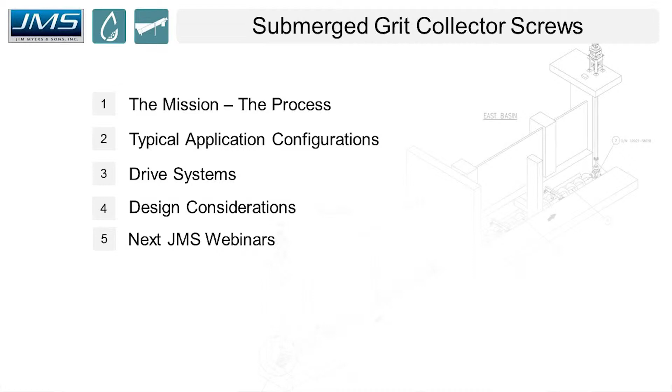These are the topics I'll be discussing today. I'm going to jump right into it — there we go, couldn't get my stuff toggled.

So we'll be discussing submerged grit collector screws. It's a classification process — we're removing grit from the process, conveying and separating grit from the water in the basin. Certainly an abrasive application, I'll hit on that further.

Today we'll be focusing on the horizontal submerged grit collector screw conveyor systems. Typically they're located in aerated grit tanks. We're conveying grit from the tanks to a trap, sump, or well, perhaps in the same basin as the screw, perhaps on the other side of a basin wall. Further conveyance of the grit is required via grit pumps or airlift pumps.

Unlike the grit classifier system — the inclined grit classifier system you see in the bottom right corner, which you're all familiar with — that is partially submerged, inclined, and conveys and classifies the grit above grade directly to a dumpster with no further conveyance required.

So what we'll be addressing here are three different types of applications and configurations: a wet chain application, a dry chain application, and a couple of direct drive applications.

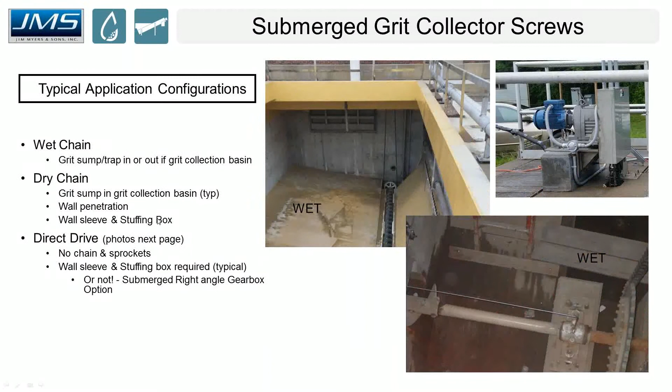Next is a direct drive application, which I'll show you drawings of. I'm moving kind of quickly, trying to get a lot of information in, but here, no chain and sprockets apply — a wall sleeve and stuffing box is employed.

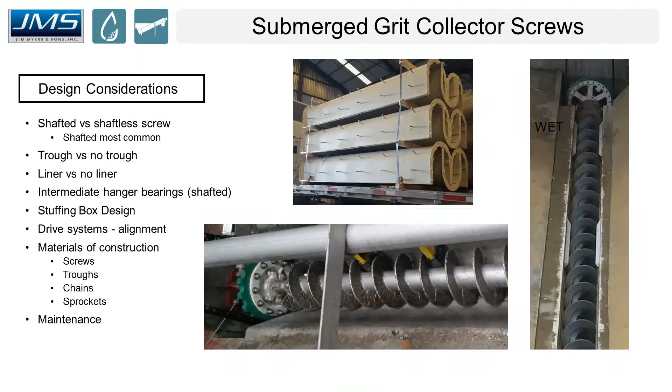Typically, a CEMA 226 type hanger bearing is employed. And by the way, CEMA hanger bearings and sleeved wall bearings are the tried and true method for these grit applications.

Proven over decades to last, these CEMA 226 hanger bearings - here's a cutout, a cross section showing the trough with the embedment anchors, the support for the CEMA bearing, which is typically stainless steel. You can see the bearing down here, and it is typically water lubricated or water flush, not grease, but water. Typically hard iron bearings and liners are employed in these hanger bearings. Life expectancy is 6 to 12 months minimum, depending on the application, size, hours of operation, etc.

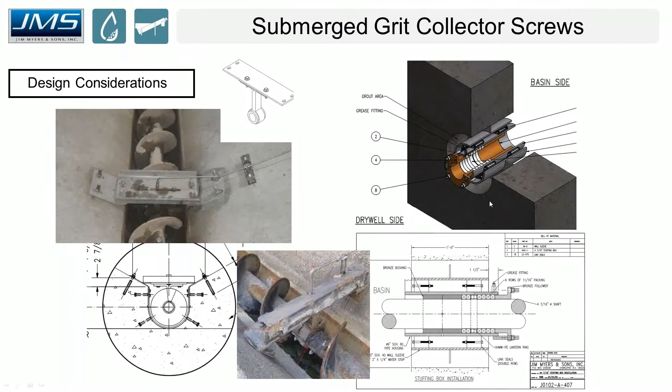That's the general design of the JMS stuffing box. I don't want to get into too much detail. Now what I'd like to do is spend a couple of minutes talking about the drive system, and while I'm at it, I'll brief you on the chains and the drive and driven sprockets as well, the design considerations there.

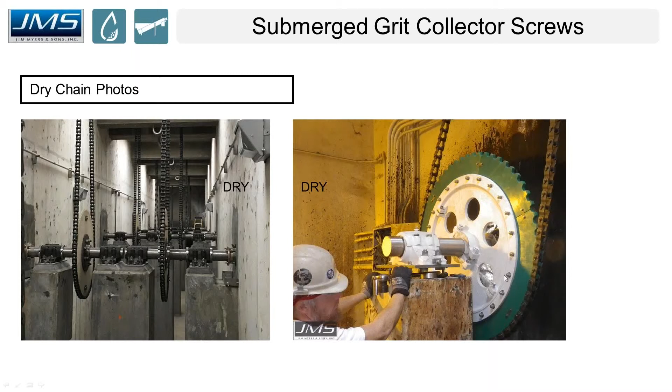And again, that AquaGuard torque limiter was another option. There it is. That torque limiter is another option for torque overload protection.

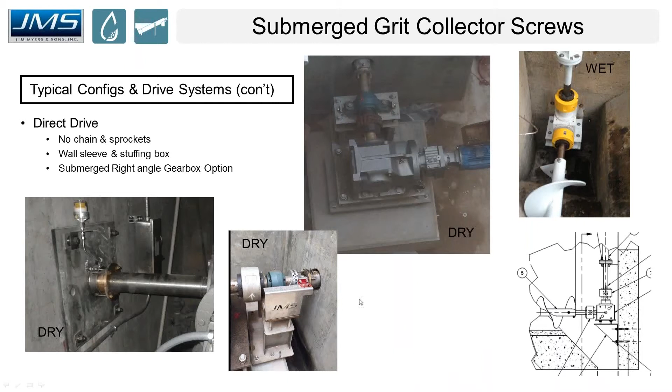And how about the chain? The chain is an engineered chain, typically an HB78 stainless steel chain, typically 403 stainless steel. 403 is not as corrosion resistant as 304 or 316, but it is stronger. This chain handles typical workloads of 3,300 pounds with a 24,000 ultimate strength load.

Why not non-metallic? Non-metallic certainly offers corrosion advantages, we know that, but it's not typical for this application because of the load requirement. As a rule of thumb, if you've got greater than 2 horsepower, you probably need a stainless steel chain versus a non-metallic.

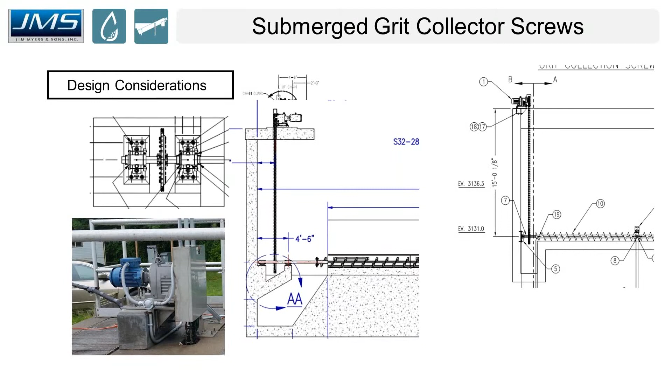I've got one more slide here, showing additional arrangements. I'm hoping the visuals speak a lot of words and help you out. On the left side, you can see the bearings, the support here, and a wall bearing. You've got a stuffing box in here, of course.

You don't want to have vertical force, or you want to minimize the vertical force on your stuffing box. So having a pillow block and support on the dry side and wet side of a stuffing box is the right design. In the middle here, you can see a screw penetrating the wall like we did in the picture earlier in the presentation, discharging and conveying grit from the basin to the left and into the sump pit here.

We've got a couple of concrete piers where we have pillow block bearings and our driven sprocket up to our drive above in a wet application. The drawing on the right is a cutout of the same thing I showed you earlier, which has the right angle gearbox in the grit area, right down here in the sump area, and you can see that as well. It's supported from the wall, and then we've got the other support over here at the intermediate hanger bearing.